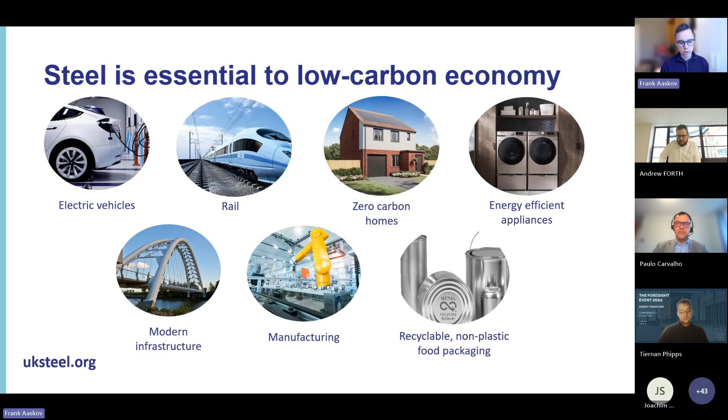Okay, fantastic. So I'm mindful of time, so I'm just going to speed through them to give you a brief overview of some of the key challenges that the sector faces. So just on introduction, effectively this has already been said. Most people here will already know this, but steel is essential to a low carbon economy. It is basically in everything, or is used to make everything, and there's no way really to get to a net zero economy without decarbonizing steel in many ways.

Even if you look at just the energy sector alone, steel is absolutely essential to that. There was a study a couple of years ago from McKinsey for the EU Commission, which looked at what materials are critical to everything from geothermal, nuclear, energy networks, wind, solar, EVs, and steel was the single material that's important to everything. And I think copper was the second one, really. But as you can see, regardless of what route you're going to go down, you will need steel, and therefore there's no way really around it.

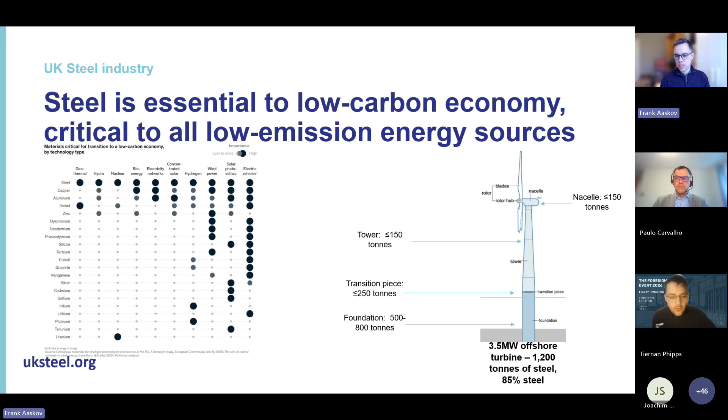Similarly as well, offshore wind turbines of this size, again, could be up to 85% steel as well. So really steel is essential. And I think we've already touched upon this. So the downside to steel is it's very carbon intensive to produce. About 8% of global emissions. In the UK it used to be about 3%. It's about half that now, just because of Tata Steel having closed down their site in October while they invest in a new electric arc furnace.

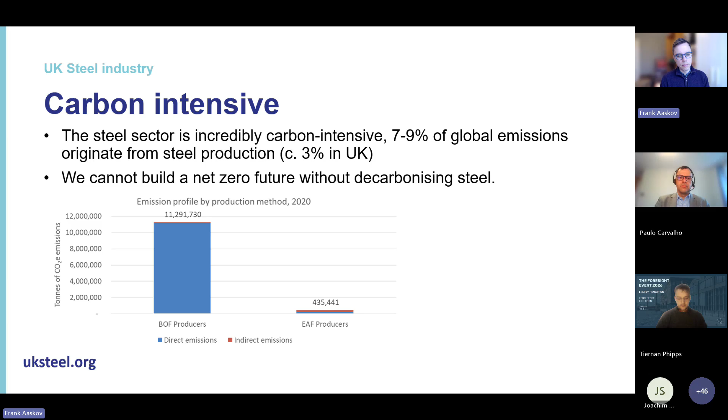So yeah, looking at the decarbonisation options, again, this is very broad spectrum. So let's start from a UK perspective on the ambitions that are being set out. First of all, we have the government's overarching net zero target that was agreed by the previous Conservative government. That basically requires all steel to be decarbonised within 25 years. That has been supplemented by a recommendation by the Climate Change Committee that we need to decarbonise the ore-based sites by 2035, so only 10 years from now instead, so much more ambitious.

And the Labour government pledged a 3 billion investment in the steel industry to decarbonise it, committing to lowering industrial electricity prices and saying it must never mean deindustrialisation either. And finally, from a steel perspective itself, we very much believe that a partnership between government, unions and industry is absolutely necessary to bring investment here and to decarbonise the sector.

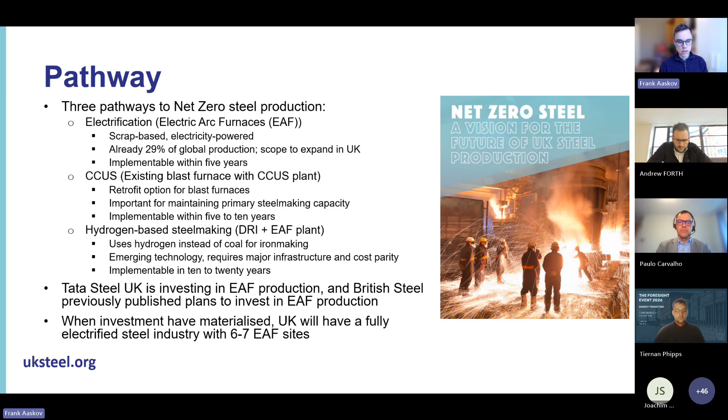If we go down the electrification route, you'll have a fully electrified steel sector with 6 to 7 electric arc furnace sites throughout the UK. Some of the challenges for the sector in making this transition are around trade intensity. I'm mindful of time, so I will speed through this. It's a very trade intensive sector, one of the most trade intensive in manufacturing. In the UK alone, we export and import quite a fair bit.

One of the key challenges is that we face a dissimilar level of carbon pricing, with over 90% of the world still not facing any comparable carbon costs whatsoever, which is very challenging when we in the UK face very high carbon costs and will increasingly do so as free allocations are reduced. That means it will be very expensive and you are at risk of being outcompeted by imported high emission steel. Steel's standardized, so we compete on price.

Another challenge is global excess capacity. A couple of years ago, we estimated it at about 500 million tonnes, which is about 70 times the UK market, where we saw expansions in Southeast Asia and the Middle East that don't really match domestic demand. Chinese demand has since reduced quite significantly, with enormous export levels. This leads to the lowest profitability in a decade and depressing investment into the sector.

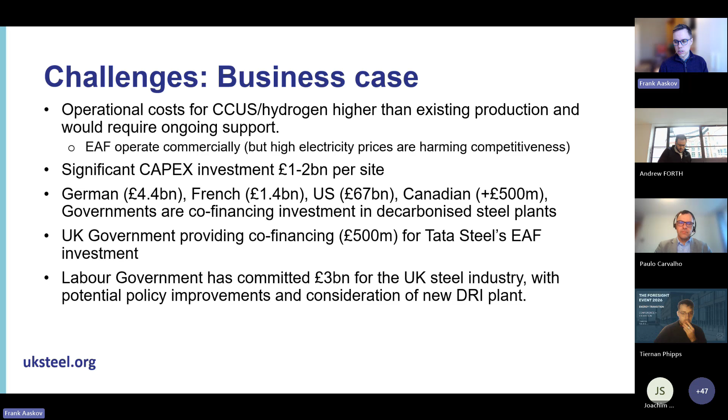Furthermore, on the business case, operational costs for CCUS and hydrogen are usually higher than existing production, which in itself is challenging. You require significant capex investment of at least 1 to 2 billion per site, and governments across the world are now investing significantly in co-financing decarbonising steelmaking capacity. The UK has now done the same for Tata Steel's electric arc furnace investment, and we are potentially looking at further investment for British Steel or others, but that is a bit challenging.

The final overall challenge is around energy prices. From a UK perspective, our electricity prices are relatively high, even after the most recent government action. Here's our analysis from earlier this year, which found that once the latest UK government initiative is implemented, we would still pay up to £12 per megawatt hour more than our French or German competitors. That has been lowered to £12; previously we were looking at £18.

They're still higher, partly due to the different generation mixes, meaning we pay up to 25% more than Germany and France, ignoring Sweden, the Middle East, the US, China, etc. The bar is quite low here, and we still can't meet it. And that's important because steelmaking is incredibly electro-intensive. Electricity costs can be up to 180% of GVA for certain UK steel producers. In the UK, we use electricity equivalent to 800,000 homes, and gas about 400,000 homes, just to put it into perspective.

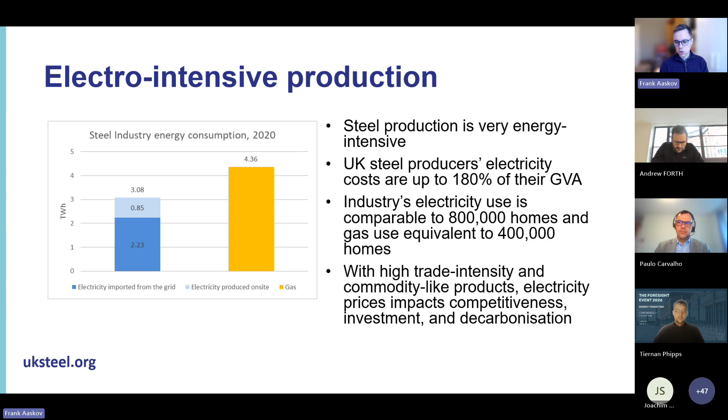Therefore, from our perspective, regardless of the route, you do need to deal with electricity prices, because all routes to decarbonisation will require higher energy consumption overall, electricity consumption in particular. With electrification, you would triple a site's power consumption and more than double it for the whole sector. If you're going down the hydrogen route, you're looking at significantly more.

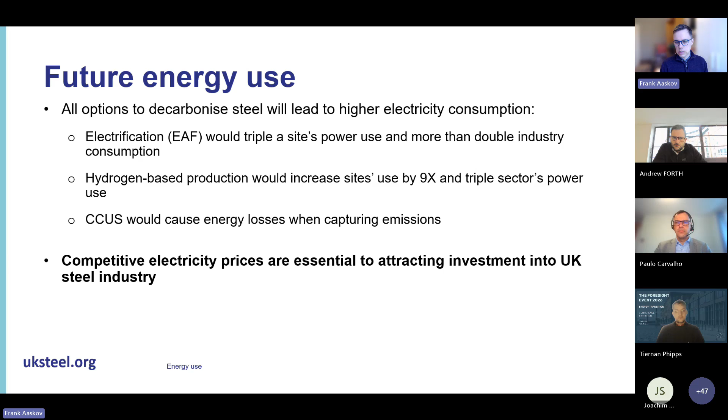And again, even CCUS would require significant energy losses when capturing emissions. So you would see more electricity needed there as well. So it really is essential to attracting investment to decarbonise that.

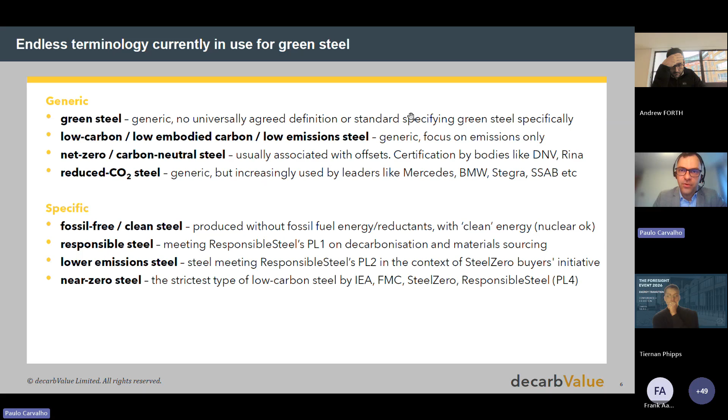And just going quickly through some examples. So this is a table from a paper I recently published with my co-author Hassan Muslemani of the Oxford Institute for Energy Studies. For example, since 2021, so almost 4 years now, SSAB in Sweden has been branding and labeling some of their steel production as fossil-free steel, as I mentioned before. And again, you saw some examples of customers using that product and even marketing those goods produced from the steel from the Swedish company using pilot volumes from their hydrogen-reduced HYBRIT facility in Luleå.

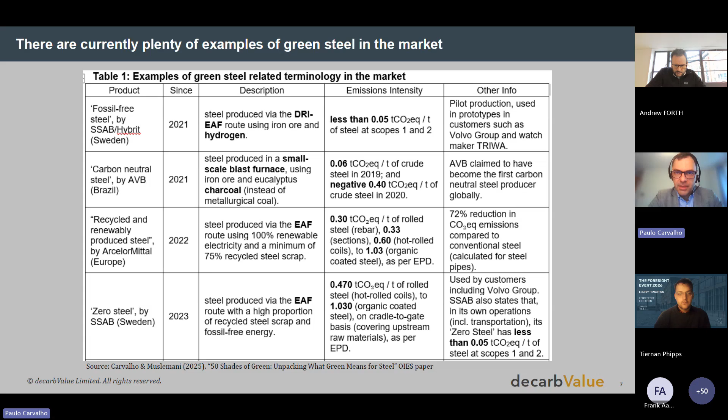You have other players, for example, in Brazil, Aço Verde Brasil, AVB, obtaining a certification from an independent body back in 2021 as well, of being carbon neutral. So they produce steel using charcoal pig iron, which has a zero or even negative carbon footprint, and then they use that to produce the downstream product that they trade in the local market. And you can see ArcelorMittal with their recycled and renewably produced steel and other steel brands popping up in the market. There are many other examples of actual green steel products and terminology being used in our paper.

But broader than that, there are many initiatives and standard setting bodies involved in classifying or standardizing concepts around green steel. None of them, with one exception, which I'll mention in a minute, specifically defines green steel, but they will all be trying to propose and promote and foster broader decarbonization, in some cases deep decarbonization in the steel sector. The most recognizable standards, in my opinion, are ResponsibleSteel, the Global Steel Climate Council, and Low Emission Steel Standard. They all have different approaches and different, let's say, scopes. Some of them will focus exclusively on carbon footprint. Others will touch on other environmental and sustainability characteristics of the production site or of the product, but in any case, they try to address sustainability credentials of steel.

And more broadly, multilateral and some national initiatives are getting involved as well. I think initially, most importantly, the IEA, maybe around the 2020s, came up with a proposal for near zero materials that includes steel, but touched on cement, aluminum, and others as well. And I think that inspired the approach used by many other initiatives and standards in the sector.

And as I mentioned a couple of times already, as of December last year, India was the first country, through its Ministry of Steel, to impose a specific definition of what is in the country to be classified as green steel. And of course, that's immensely important because that's going to inform procurement decisions at public sector level, potentially at private sector level as well. It remains to be seen whether this will be actually adopted by market participants outside or around India, or if other countries will follow as well.

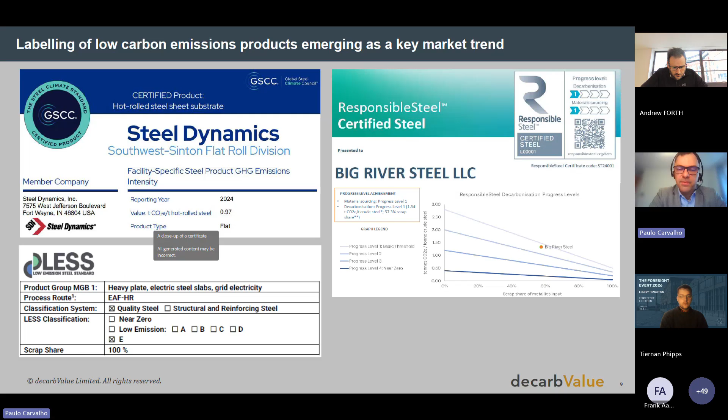And finally, more recently, September last year, only a couple of months ago, the European low emission steel standard certified Salzgitter plates and a few other European players on their steel products as well. In this case, they achieved E classification, which, if you think of your light bulbs you buy in the supermarket or washing machines, they have this kind of ABCD classification system. In this case, they achieved the least stringent one, but they still achieved it under 100% scrap. They don't disclose at this stage the specific carbon footprint of that specific player or site.

And the final messages around this topic would be: harmonization in emissions accounting methodologies is progressing. It's still lacking, but we see some good examples, for example, the Sustainable Steel Principles by the WTO. Convergence in definitions of green steel is unlikely to fully take place anytime soon, but promising convergence is taking place, for example, some recent partnerships announced by ResponsibleSteel, LESS, and the Chinese Steel Association's own methodology. And the scrutiny over these green claims, so what players can call green iron and green steel, is increasing.

For example, countries like India being quite strong about that, and I think market participants need to prepare for an inconsistent landscape in terminology and decarbonization. And higher transparency, of course, is a key competitive advantage for someone who can differentiate. I'll just quickly go through the second topic, and then I'll skip the third topic. I'm happy to go through that with anyone who wants to follow up.

Just to mention that, as you will know, the European CBAM is starting next year. The timeline is quite clear. There will be liabilities for importers from the 1st of January, even though payments will only take place later, in September 2027. There are many new things that came up yesterday: the benchmarks, the default values, the rules for implementation. So there's a lot to digest and to understand, but the key opportunity for market participants is to disclose the actual emissions, especially if they produce low carbon steel, low carbon materials in general, because then they will be able to avoid the hefty default values.

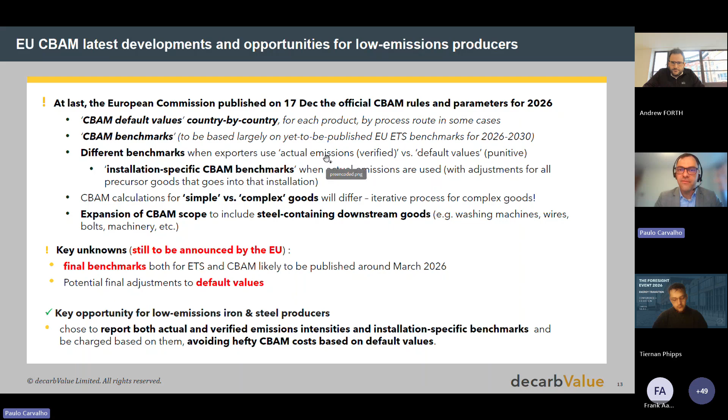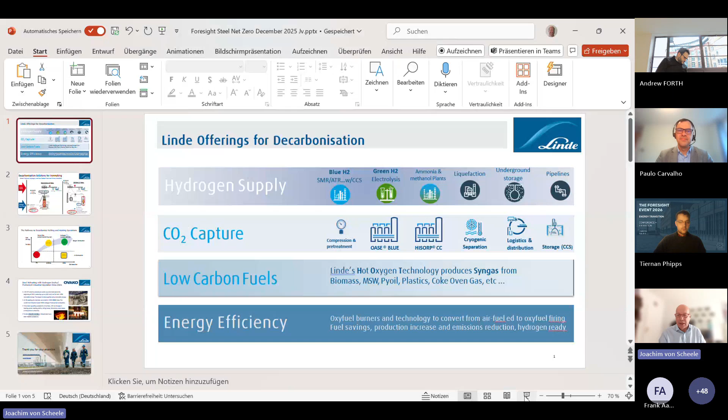So let's discuss a bit on steel and the task we have before us here. I'll pull up a slide on my screen here. I hope you will be able to see that one. But before diving into details, let us define what the task is here. So it's about decarbonisation of the steel industry. If I look across Europe, we can see a big reduction of CO2 emissions from the steel industry over the past few years. However, that is because of deindustrialization. That is due to reduced output.

And of course, that is not what we would like to do anywhere in the world. We would like to maintain the industry, but have a cleaner industry. So we have to think about it from that type of perspective. How can we make a change which doesn't mean that we are losing jobs, that we are losing industrial infrastructure? And this is being more and more pronounced, of course, in political and geopolitical considerations, and also when it comes to supply chain security. So it's a challenging task, of course.

And that then brings us into the question of pathways. I think we can separate between what we can do today, what we can do immediately, and what takes longer time. There are multiple pathways for sure, and Frank and Paulo have already touched upon this. There are various solutions, and they can be implemented in different steps. Not all of them are suitable at every location. There are various preconditions, and we can have parallel developments. We can develop new processes at the same time as we are implementing what we have at hand today.

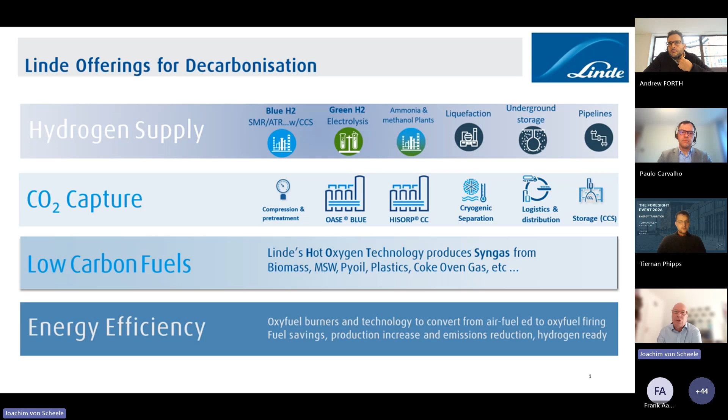It's very important that we look at having certification of what is the real carbon footprint and also the possibility to scale it up. Because if you look at iron making, we need a lot of hydrogen if we will use solutions with that. That could be, of course, to inject it into blast furnaces to a certain extent. We have been involved in that over time. But of course, as already touched upon, using hydrogen for production of direct reduced iron, and that is not that big a step technically, but it requires a viable supply.

But first and foremost, we should look at carbon capture in this context. I would argue that carbon capture is the benchmark. I mean, the first thing we should explore at an existing site is to see if we can do carbon capture and at what cost. What we have seen is that in most locations in the world where it's possible to do carbon capture, that is also the cheapest solution. I know that some people argue against this from various perspectives, but I think it's worth exploring it, definitely.

We can use low carbon fuels also here. We can gasify waste and use that for the reduction, for sure. And we could use DRI, HBI, hot briquetted iron, also in a blast furnace to reduce the carbon footprint of an existing blast furnace. We should not forget about that part of it as well. So this is the iron making then.

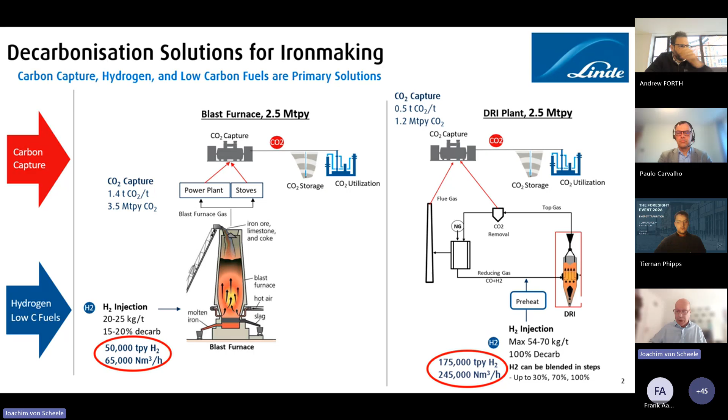And I would argue that over time, it actually means that we have a mission creep here, in terms of the steel production also going to those countries where these iron units are produced. So you need to be very much aware of that when arguing about breaking up the supply chain here. And then on steel making and downstream, there is a lot that we can do already today, in all these electric arc furnaces, ladle preheaters, reheat furnaces, and so on, when it comes to doing fuel saving.

And that is by increasing the energy efficiency, going from air fuel combustion to oxy-fuel combustion, and doing that in a fashion so we can then be ready for using hydrogen. So first we fire less, and then we fire with the clean fuel. These types of transitions are taking place at many places, and we talk about reducing the carbon footprint by around 30% on average in the first step.

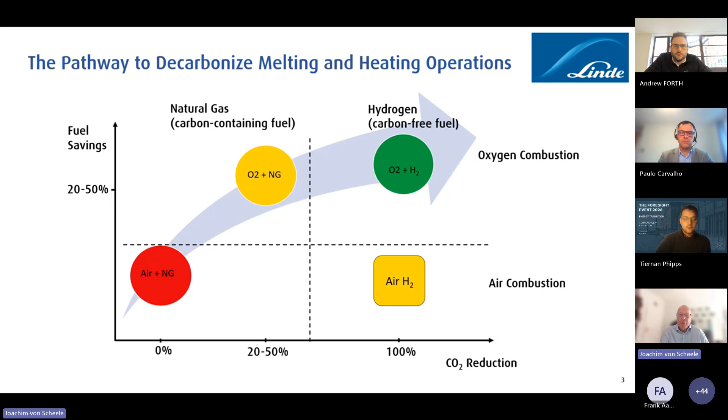And I would then highlight that going from air fuel to oxy-fuel combustion is a bigger reduction of the carbon footprint than blending in 50% hydrogen into a natural gas fuel and using air fuel combustion. And it's much, much cheaper as well. So it's much more efficient to do this type of step. And then, of course, in the second step, when there is a viable supply of hydrogen, we can use that for those various operations for melting and heating.

And I give you one example of this from reality. This is a project we worked on together with the steelmaker Ovako. This is from their site at Hofors in Sweden, where since last year, all the reheating in the soaking pit furnaces is taking place using 100% oxygen plus 100% hydrogen.

This works very well. Since it started up almost 2 years ago now, 500,000 tons of steel have been produced in this way. And there is an electrolyzer on site, which is supplied by renewable energy. And so the oxygen, the hydrogen that goes in there has zero carbon footprint. So I think this is a very well-defined, very green steel that comes out of this. And again, an example from reality, more than 500,000 tons of steel have already been produced here.

So we don't talk about any ideas for the future. We talk about reality in the same fashion as we talk about reality when it comes to carbon capture and the other solutions. There are a lot of great examples there. We need to have legislation that is supportive of this. We need to dare to take these steps also. But we have a rather low risk due to the many installations that are there.

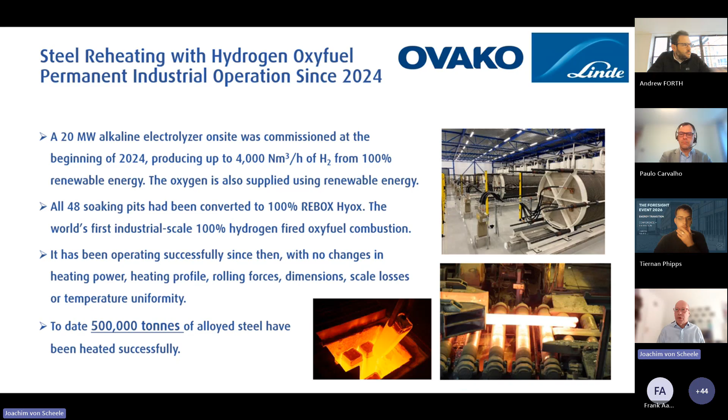If I take Linde as an example, we have done more than 600 installations of oxy-fuel combustion in the steel industry. So I think that is something that we can do already today. In parallel, of course, we should work on developing new processes. There is no conflict between the two, and we should work on making sure that we have technology-neutral legislation. And I stop there.